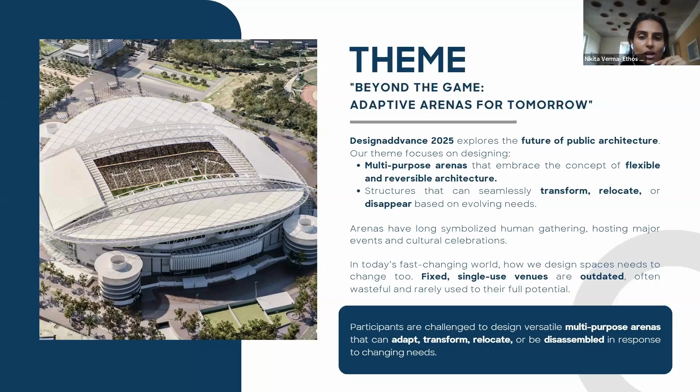municipalities. So, with that in mind, it is important that they are multi-purpose, they are flexible, they can transform, they can relocate, they're adaptable, and they're not just single-use and outdated venues, but are actually using resources more efficiently and are being used to their full potential. So that's the background of why this particular theme.

Now, going back through the history of civilization, even thousands of years ago, an arena existed. We all know about these very historic amphitheaters in Roman and Greek architecture. And then in between, when all the sports took off, we have fancy FIFA stadiums and cricket stadiums, Olympic stadiums.

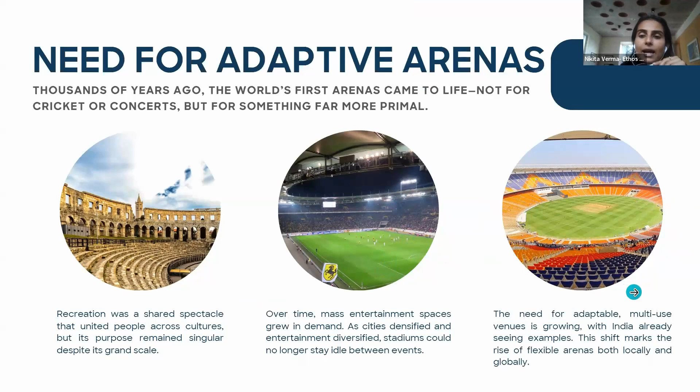But now with this conscious decision towards being more sustainable, more resource efficient, we are now in this era of adaptable multi-use venues, and we are already seeing some examples within India and of course in other countries across the world. And this is the era of making this shift towards flexibility. So let's look at some quick case studies so that you get inspired and understand what is really expected from you out of the competition.

The first case study that we are doing is the Stadium 974 in Doha, Qatar. We all know that Qatar hosted the FIFA World Cup just a couple of years back, and this particular stadium is made using shipping containers as well as modular steel elements, right?

So that means these are modular, these can be disassembled, reassembled, and so on. So flexibility is the key here. The stadium can be disassembled and rebuilt in any other place in a new location, either in the same configuration or in different configurations as well, because it's a modular system.

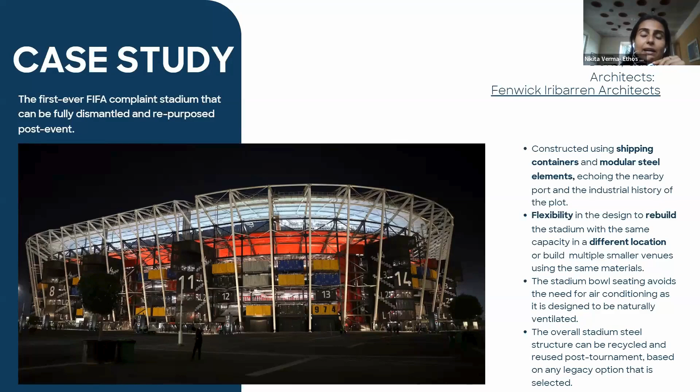This stadium is also very interesting from the perspective that it avoids the need for air conditioning. It reduces the load because the system is designed in a way that all the seating area is naturally ventilated. The overall structure uses steel that can be recycled and reused after the tournament is over.

Let's look at the second example today, which is Air Albania Stadium in Tirana, Albania. And this particular stadium, again, is designed to be a multifunctional venue that is designed to ensure safe, seamless separation of activities, allowing multiple activities and events at the same time.

The historic facade also adds value and kind of echoes the form of a Greco-Roman theater, which is relevant to that particular region. The building is, of course, a landmark for both sports visitors as well as cultural experiences for any visitor in the city. Steel design was synced with CNC machinery, ensuring high quality, fast production, so that the building can be assembled in much shorter time.

Let's look at a case study back home, which is the Ekana Stadium in Lucknow. It's an indoor multi-sport stadium in the capital city of Uttar Pradesh. And this stadium is used beyond cricket, as some of you might already know. It is, of course, a stadium of excellence, one of the best ones that we have in the country, with world-class infrastructure.

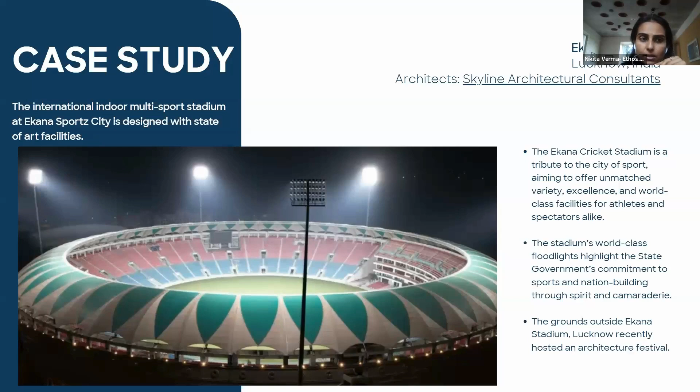But at the same time, the grounds outside the stadium are often used for hosting expos, exhibitions. More recently, the Lucknow Architecture Festival that we all might connect with. And it's often also used for practices and so many other activities beyond just the national and state level cricket matches. So that's another case study to look at in our own hometown.

So what exactly is the task? I see some hands being raised. Maybe we can take the questions once I finish running through the slides.

Thank you. So the task is, I think we are being repetitive here, but for those of you who might have joined later, a multifunctional, sustainable, accessible, future-proof arena. You're invited to design spaces that can transform, relocate, or disassemble as needed, provide as much flexibility as possible to these arenas to host not just that one particular sport it's being built for, but multiple other kinds of events.

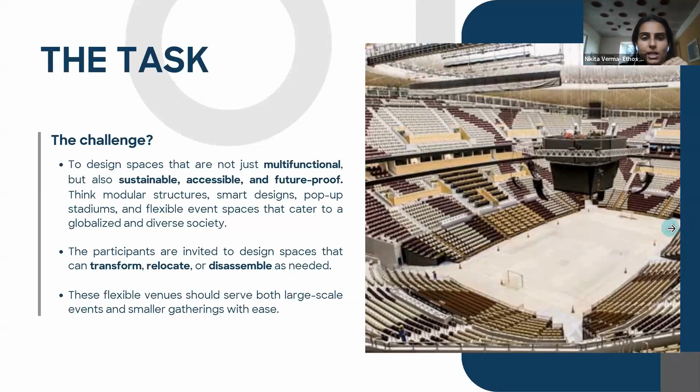For example, the DY Patil Stadium in Mumbai not only hosts cricket matches, but we all know that Coldplay was also a concert that was hosted quite recently over there. So that was an adaptation from being a sports venue to a cultural venue, and how more such cases can be taken up. So there are some guidelines and site program, which is of course detailed out in the brief document as well. But for your understanding, let's look at some of the salient points.

The site that you pick has to be in an urban setting. It can be any city of your choice across the world. It should be at least 10 to 15 acres, because we are talking about a large scale gathering of hosting at least 40,000 spectators in a major event. Of course, take into consideration the local factors like the climate and cultural context.

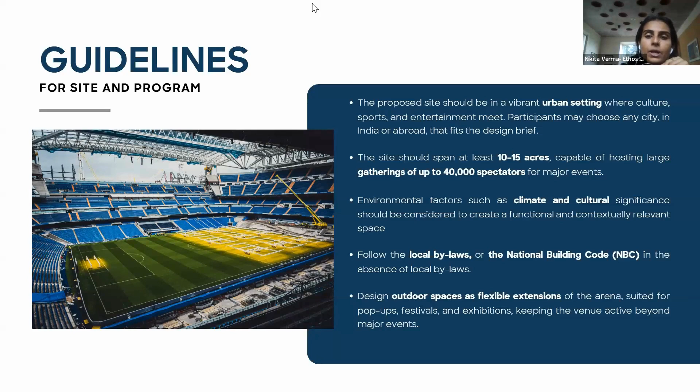Follow any local bylaws or national building code in the absence of local bylaws, and think of the outdoor and the extension spaces around the stadium that can be used for other events as well, apart from what's happening inside the stadium. Design considerations cannot emphasize more on adaptability and multifunctionality.

Scalable, how does your design allow for better crowd management? Is it ephemeral? Is it a reversible and circular design? Can this move or be configured in other ways than what it exists in? Do think about universal accessibility and experience. Cultural sensitivity and architectural identity, so it's responding to the context it is built in. Sustainability, and of course, it needs to be smart infrastructure with digital integration, because we are in the era of that right now.

Awards and cash prizes. There are handsome cash prizes for the first, second, and third prize winners. Apart from that, every eligible entry gets a participation certificate. The best 10 entries will be published on the competition website. And also, all the participants who've submitted their entry also get a discount voucher of 40% for a BIM design program. And there'll be recognition for institutes that manage to adopt the competition brief into their classrooms.

So, if you haven't registered yet, please go to the website designaddvance.in and register your team. The submissions close on October 29, so we have quite a lot of time from now onwards. And if you have any doubts about eligibility, let me also just take you through that.

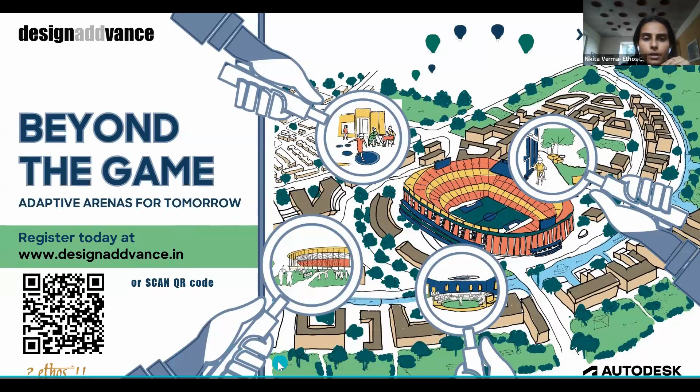Any other hands raised? I think I'll stop sharing my screen if there are no more questions. Then back to you, Team Arkance, for taking it further. Okay, thank you, Nikita, for decoding the brief. And also for the participants, if you still have questions, feel free to drop it in the chat box, and then we'll be answering all your questions in the end. Okay, so allow me to share my presentation.

Okay, now I'll be quickly giving an introduction of my company, Arkance India. So Arkance India is a leading technology and engineering solutions provider, especially focusing on digital transformation for the construction, manufacturing, and infrastructure industries. The company leverages advanced software and strategic consulting to empower AEC businesses through smarter design. Also, we have a global presence, and we have more than 550 plus technical resources spread across the globe.

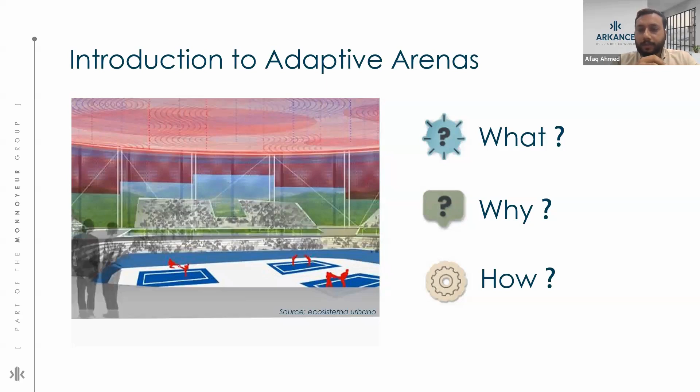as a competition, you will have to prepare a design that will stand out among others. So for that you need to understand why we need to have adaptive arenas. So I believe that there are three questions. If you can answer these three questions correctly, then you will be able to produce the accurate or the right result.

So let's try to understand what exactly are adaptive arenas. Arenas, as you know, are a place where people come together to watch sports, enjoy concerts, and maybe celebrate culture, or maybe for public interactions. And when we add adaptive, it means the concept of flexibility. Whether these arenas are flexible enough to carry out activities apart from sports, like whether they can be used in the time of calamities, or in the time of urgency, in the time of need where people need shelter.

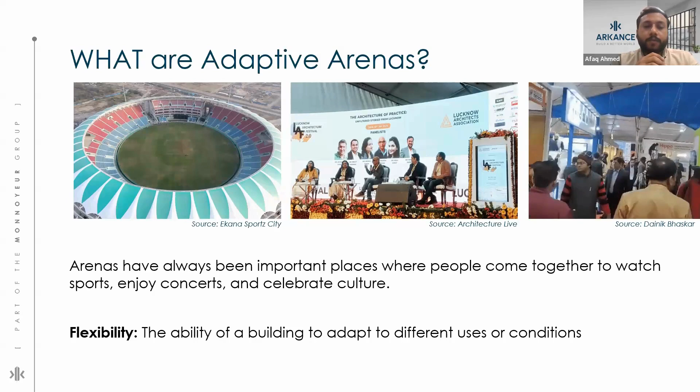So once you understand that adaptive arenas are of course those which can host multiple types of activities, not limited to only sports activities. So okay, we know what arenas are, but why do we need that? Why is there lots of emphasis on creating adaptive arenas? This is the reason why the theme for this year, Design Advance 2025, is adaptive arenas. Now, the number one reason is the rapid population growth.

You know that now India has become the most populous country in the world, and New Delhi is the second most populous city in the world after Tokyo. So, with this rising population, people really do not have the space for recreational activities. We all know how physical activities are important for the betterment of human beings. But seeing the congestion in the cities, unavailability of land spaces, people are forced to live in ghettos, right? So this rapid urbanization and population growth has become a major challenge for bigger cities, which often leads to degraded quality of life.

Another important factor why we need to have adaptive arenas is underutilization of spaces. Most arenas are used only for specific events and times, and so they remain empty and unused most of the time. So imagine how much money and how much material have been invested in creating those gigantic structures, and just imagine that they are used once or twice in a year, and they remain unused throughout the year. They often degrade with time. So it seems like it is somehow a wastage of money and resources.

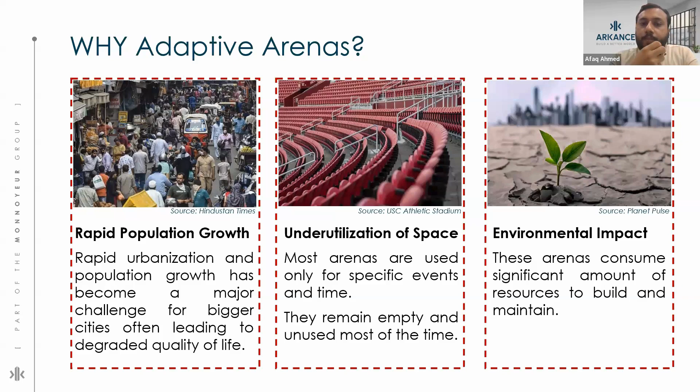And another reason why we need adaptive arenas is to encourage community engagement, because these spaces can serve multiple community needs. For example, people have a habit of going on morning walks. But imagine that if you do not have such parks and spaces in your locality or in your society, of course you will not be able to go for a morning walk. In fact, one example I can recall is Jawaharlal Nehru Stadium, which is open to the public in the morning, and you will find a lot of people going there for morning walks. So, like that, we can also use these stadiums, these arenas, for different other activities as well. This will also help us in strengthening public values.

And another important factor is the rapidly changing needs. We all know the number of hazards that are happening here, and the calamities that have been caused. Recently you must have heard about the incidents that have occurred, which have displaced many people. You can see cities are getting flooded, and sometimes there are earthquakes, sometimes there's a fire breakout. So in those situations we need to relocate people very quickly in order to provide them shelter.

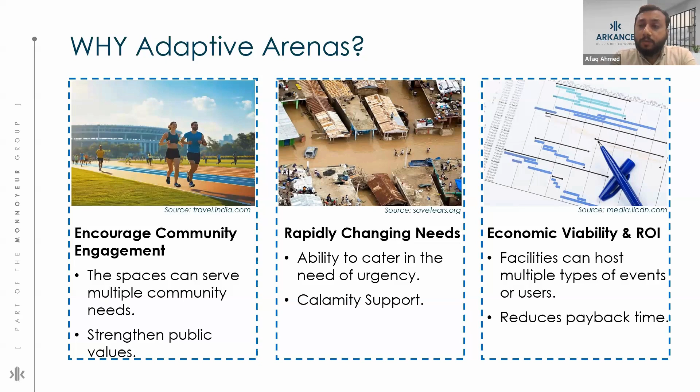So now you must have got a little bit of an idea of why it is important to have adaptive arenas. Why not have them just for sports events and let them be vacant for the entire year? Now, the third most important question is how we can achieve adaptive arenas. And of course, this will help you a lot in competitions, because this is where you will be thinking a lot about how you can create adaptive arenas, right?

So in order to answer these questions, I have tried to break this down into three parts. The first part is about planning and designing. This is, of course, the first stage of any construction or any project, right? So we will have to do the right type of planning and the right type of design for creating those adaptive arenas, because this is the first step. If your first step is wrong, then your second and third steps will have an impact of it.

Once you have done the planning and the designing correctly, the next part that comes, which is a very important part of the competition, is what kind of material do you choose. Choosing a material is again very important, I will say, because your entire structure will be dependent on that, and the lifespan and the adaptability features will all depend on the materials, because material is going to help you in changing the activities of the stadium or arenas.

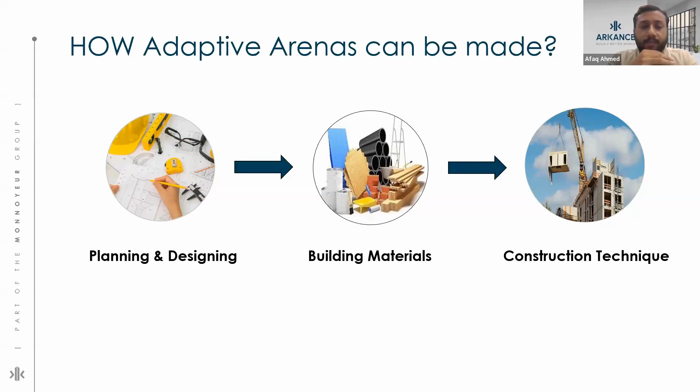Now once you have the right set of materials with you, next comes how you can assemble those materials, how you can use those materials, and what techniques you can use for building up these adaptive arenas. Now in the next slide I have covered these three steps in detail, so that you can get an idea of what points you can consider while planning and designing. So just a second.

Now, the examples that I am telling you have all already been experimented with on actual projects. If you take the example of Madison Square Garden in the US, that stadium can easily be converted from basketball to ice skating to hosting different events, right?

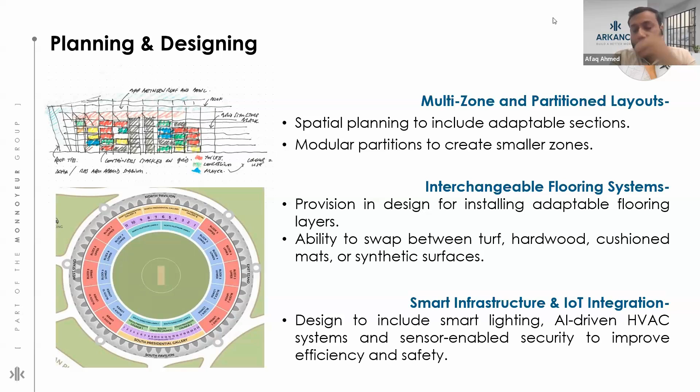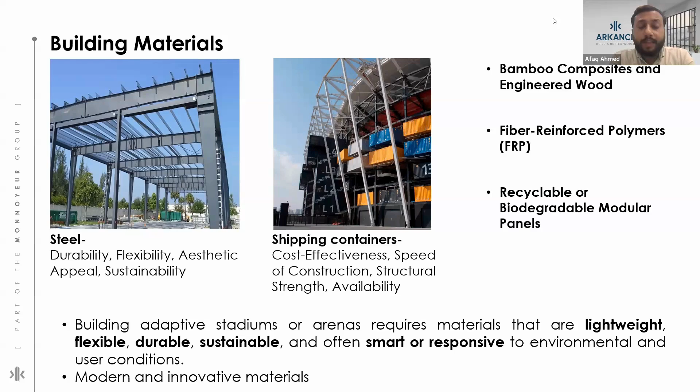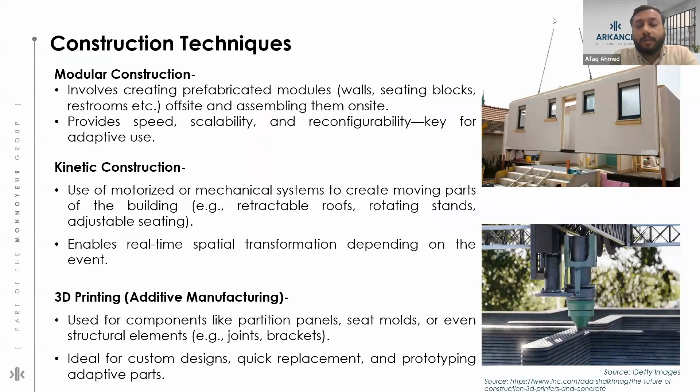Next comes the construction techniques. So what technique will you be using? Will you be using the traditional system that we already use for creating structures? Or is there some kind of innovation in that also? You are well aware of modular constructions, prefab constructions, where you develop the components of the building in a factory, then bring them on site, join them with different details, and then you have an entire structure ready. So that can be one concept, of course.

Like in the case of Stadium 974, which I'll be talking about later in detail, focusing primarily on its adaptive features. But in Stadium 974, you can see that shipping containers have been used, and the technique they have used is modular construction. Another concept can be kinetic construction.

Now, what do you mean by kinetic construction? It is something where you can practically move the building components. Like if you have a smaller area with a partition wall, this partition wall can be moved to create large spaces with the help of some motors or mechanical systems, maybe retractable roofs, rotating stands, or adjustable seating as well. This enables real-time spatial transformation depending on the event. Depending on the need, maybe you can use it on the outer facade where you can easily control the width of the entrance, right?

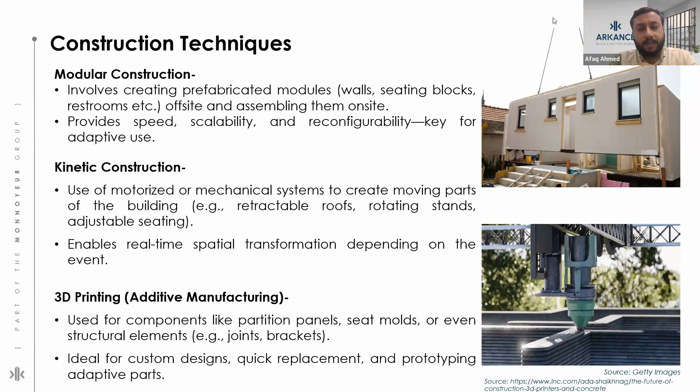And then the third technique which you can use is, of course, 3D printing. We are not printing the entire arena, though we can make components using 3D printers. You can make partition panels, you can create seat molds, or even some structural elements like joints and brackets can be created from 3D printers.

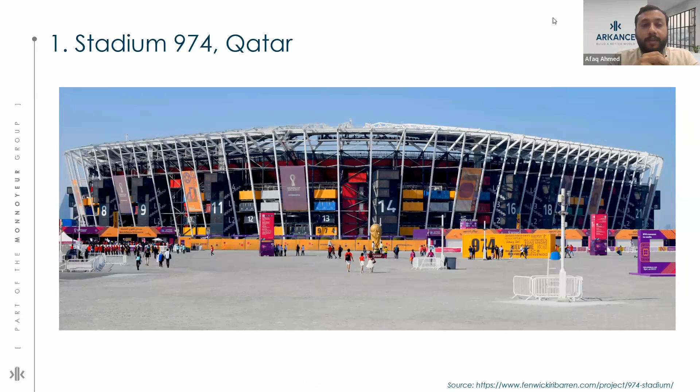Okay, so now, since these case studies have already been covered, I will try to cover them from another aspect. So if we talk about Stadium 974 Qatar, this is my question to everyone. You can drop your answers in the chat box: what does 974 stand for here? This is a very unique digit, Stadium 974, and it has a very good logic behind it. So if you know what 974 stands for, feel free to answer in the chat box.

And then the general information of this stadium: it is located in Doha, Qatar. It has been designed by a famous Spanish architect, Fenwick Iribarren Architects, and the major event that has been hosted here, if you are football fans, was the 2022 FIFA World Cup. And this is the first completely movable stadium in the world. The entire stadium can be dismantled and transported to other sites.

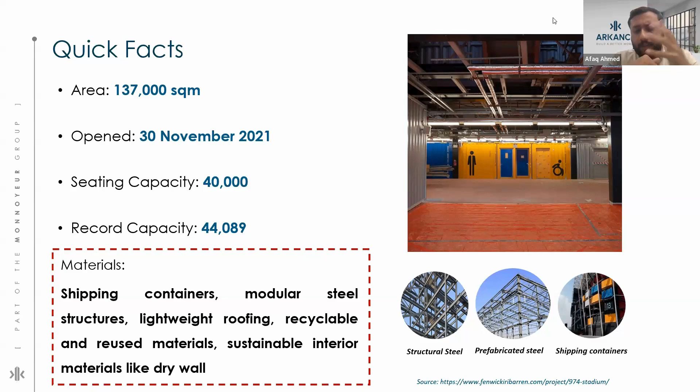Now, quick facts about Stadium 974, and of course, pay attention to all these details in the case studies because this will help you in fetching out some unique and innovative ideas for your entries as well. The area of this stadium is 137,000 square meters, and it has a seating capacity of 40,000. The major material that has been used here is shipping containers. With that, the main structure is composed of modular steel, and it has lightweight roofing and recyclable and reusable materials. And along with the shipping containers, drywall has also been used.

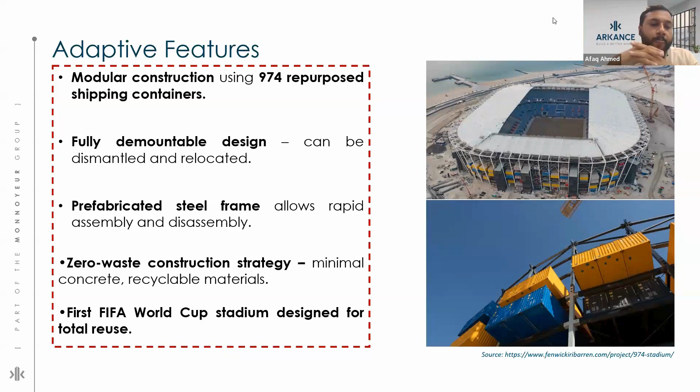Now, if you talk about the adaptive features, the first feature is that it is fully demountable. It can be dismantled, transported, and easily assembled again on another site. Then it has a prefabricated steel frame, which allows rapid assembly and disassembly. Then zero waste construction, because you are not demolishing anything, right? Whatever you are dismantling, you are using again. There is a concept like the traveling circus, where you create the entire space as per your need, and once your work is done, you can just take it back with you, right? So this was the first FIFA World Cup stadium designed for total reuse.

And about the conceptualization, again, you can take some hints from here as well. These shipping containers are placed on grids. We all know as architects and engineers how important grids are for us. So these containers are placed on the grids, and they are also color coded. As you can see in the concept, the red colors are used for toilets, whereas the blue color is used for prayer. So likewise, it has been color coded.

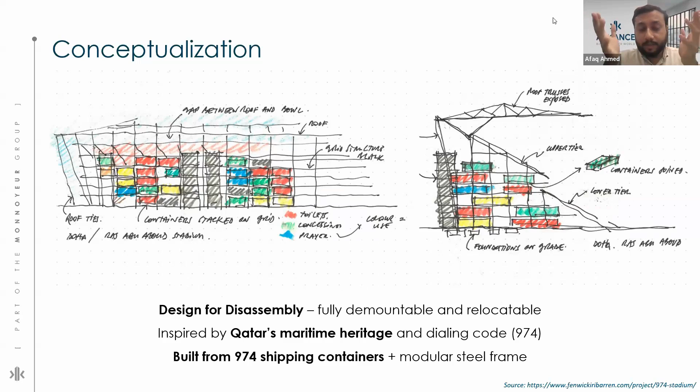And the second example I have for the case study is Air Albania Stadium. It's located in Tirana, Albania, and it has been designed by a very famous Italian architect, Marco Casamonte, who is also a full professor at the Faculty of Architecture, University of Genoa. The major event that has been hosted in this stadium is the 2022 UEFA Europa Conference League.

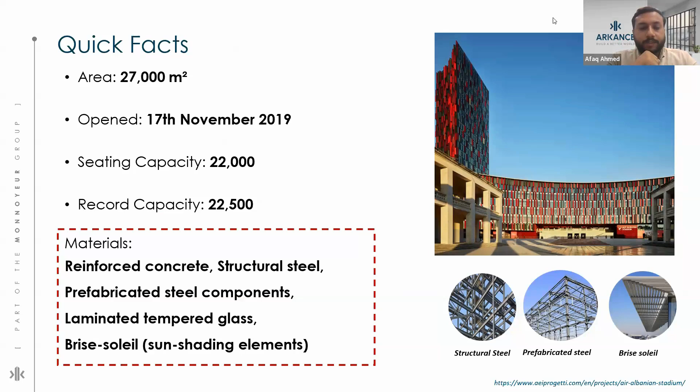Now, the quick facts about this stadium: the area is around 27,000 square meters and the seating capacity is 22,000. If you talk about the materials, reinforced concrete has been used, structural steel is there, and you have prefabricated steel components as well. They have also used brise-soleil here as a shading device. Now, the adaptive features here are generally in the form of planning. More emphasis has been given to the planning stage rather than to the material. It has a multifunctional octagonal design.

Also, the integration of BIM and the CNC fabrication. So the benefit that we get using BIM is that we have the entire information of the stadium in the digital format. So whenever we need to take a decision on whether we can use it for multiple activities, then of course you have information about different walls, like which type of wall can be moved, especially which type of flooring can be interchanged. So all this information is already stored in the BIM model.

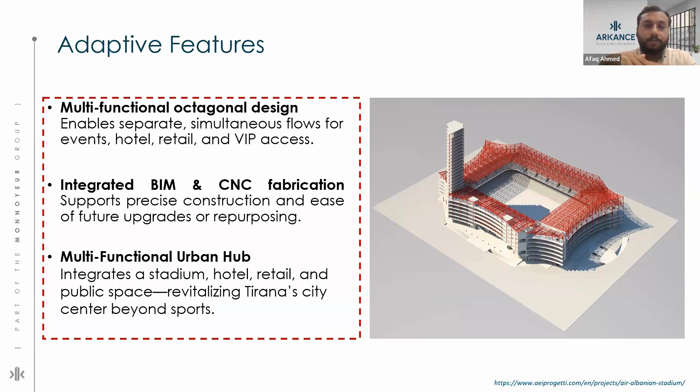Also, it is a multifunctional urban hub. It's not only for sports events, because it integrates the stadium into hotel, retail, and public space. Again, you can get an idea from here, like if you are proposing an adaptive arena for a specific place, and the place is short of hotels or retail or public space, then you can just integrate these spaces also. It's not necessary that only once the sport events are done you will reuse it. You can integrate different activities, just like in the case of Air Albania Stadium.

Next, we come to the Ekana Cricket Stadium located in Lucknow in India. This has been designed by Skyline Architects. The major events that have been done here are, of course, one day international matches. Apart from the sport events, the oath ceremony for the UP CM has also been done here. And as I talked about initially, the Lucknow Architecture Festival has also been hosted here. So you can get an idea that it's not only meant for sport events. They can also be used for multiple activities.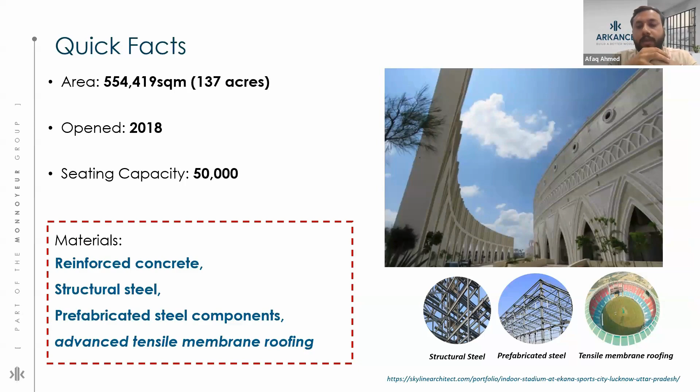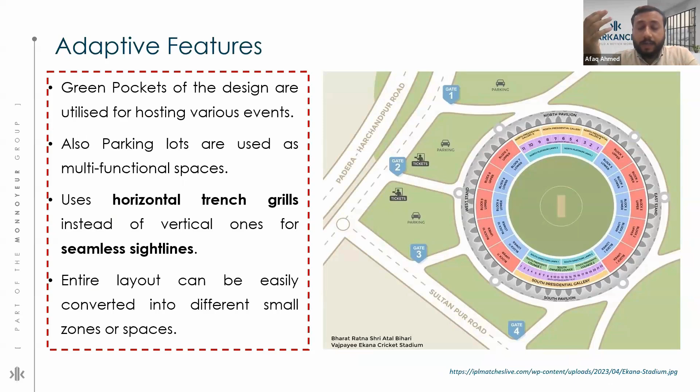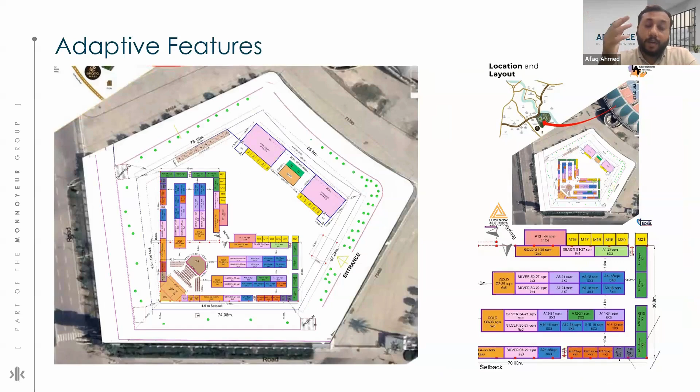Now, if I talk about the adaptive features of this, as you can see on the screen, this is the layout of the stadium. I have personally attended the Lucknow Architecture Festival. So in the next slide, I have some layouts that were used during LAF. You can see how the empty pockets or the green pockets of the stadium are used for hosting a 3-day event of architecture for the architecture fraternity. Right.

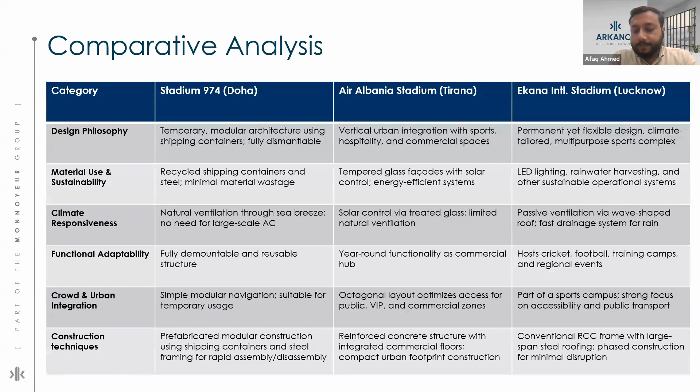So now since we are already running short of time, let me just quickly move to Revit and let's see how Revit can help us in creating successful adaptive arenas. So I'll stop sharing my screen now and I will reshare my screen. Let me just quickly open my Revit.

So again, this is my open question to all: in what ways can Revit help you? Okay. So what is the difference, like why are we using Revit, why not AutoCAD? Even if we are using Revit, we cannot just create simple walls, simple roofs, simple columns; that will not work out. We do not want to create something traditional. So we need to think out of the box in creating those adaptive arenas. So let me just open a new project.

So there are three features of Revit which you can use for preparing your proposals. One is the massing feature that we have in Revit. Second is adaptive families, and the third one is design options. Now, why I'm saying design options is because you will have to show your space in multiple formats. One space you will have to show for multiple activities.

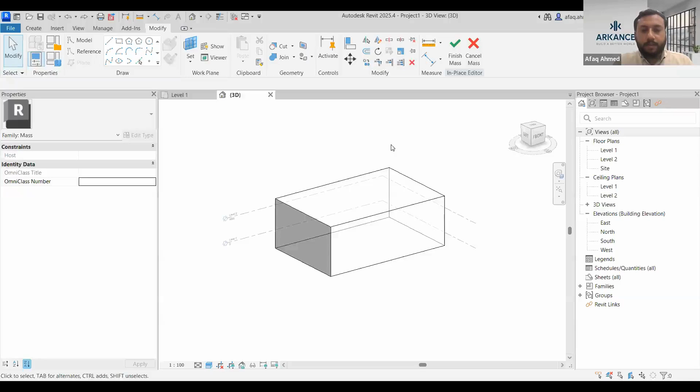Okay, so let me just quickly recall what I have done. Let me delete this and show you the process from the start. Let me come out from the massing mode. So the first tool that you can take help from in Revit is massing. In order to use massing, you need to go to the Massing & Site tab here. Then you need to go to In-Place Mass, let the name be Mass 1, and then I activate my mass mode.

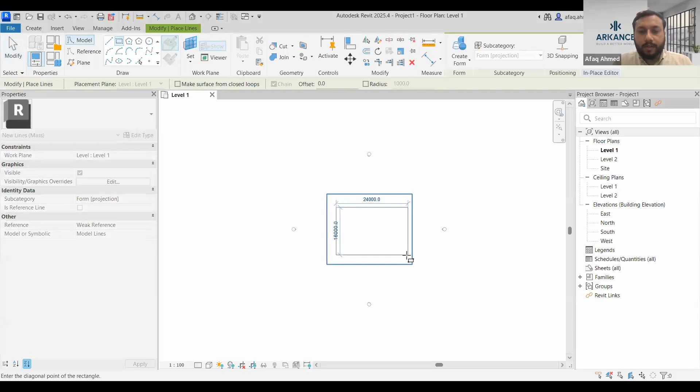Then I need to create any shape or profile. If I need to create a cylinder, then I need to create a circle, or if I'm to create a cuboid, then I can simply use the rectangle tool, create a rectangle, and it's better to work in 3D while working with massing. So I'll go to the 3D view, select this profile, and then I will go for creating a form. You can also change the height from here. Maybe I just have it for 5 meters. That's it.

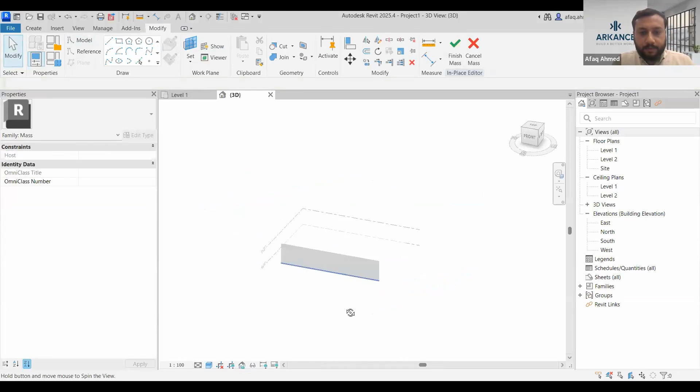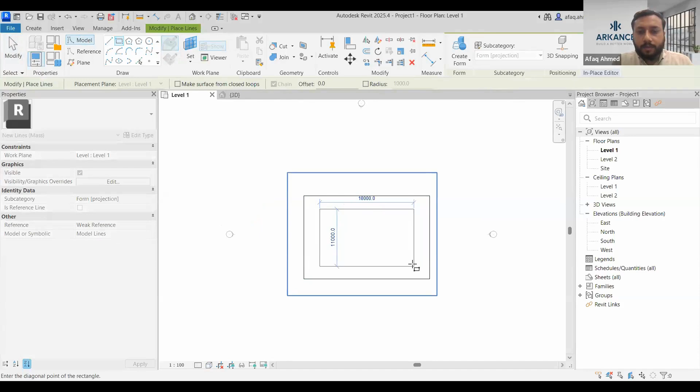Let's say you want to create a cavity inside it. So again, you can go to Level 1. Again, I will create a rectangle inside, or maybe I can use the option for lines, or maybe I can go with the rectangle tool. So I'm just approximately drawing the rectangle with offsets.

And if I select this rectangle inside, now I have two options, either to create a solid form or I can create a void form as well. So selecting the shape or the profile, I can go this time with void form. As a result, this will create a cutout from inside. Now you can also try with an elliptical shape. You can also try with circular. The steps remain the same.

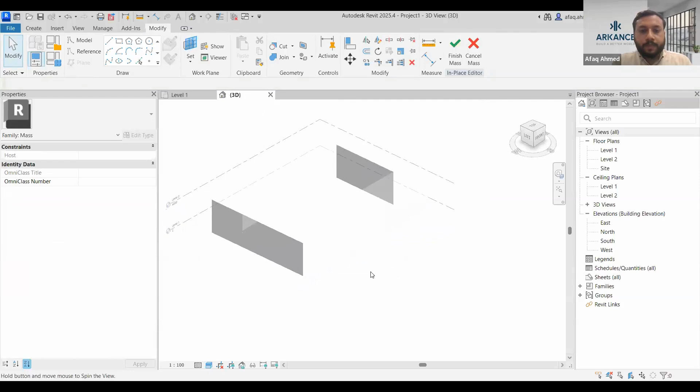And also the advantage that you get is, if I need to change this, I can just change it from here. Simply, I will be picking up this line and then changing it a little bit like this.

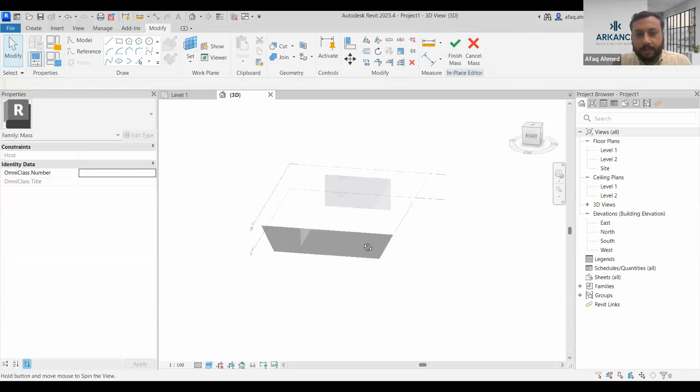So this will ultimately be taking the shape of your stadium, right? Maybe. And another advantage that you get working with massing is that you can convert these elements into walls, floors, right, into different structural elements. Let's say if I've created this facade at the side, which is of course inclined, so it will be quite difficult to make curtain and the panels here.

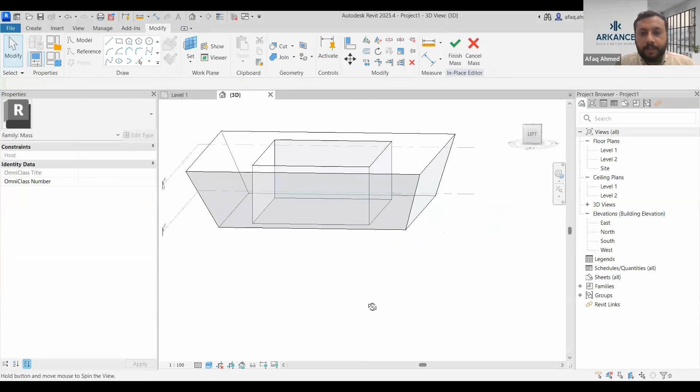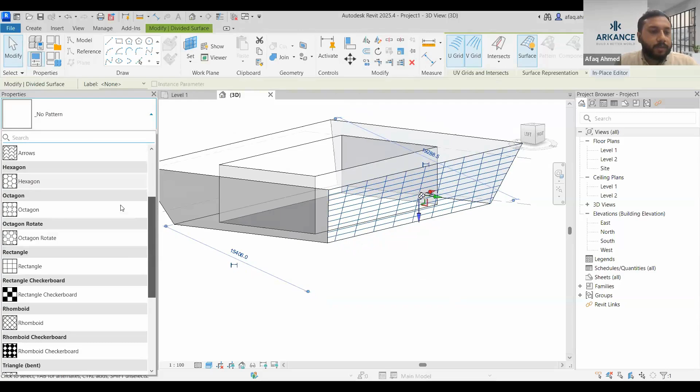But we have an option that I can convert this face. I can select this face, and I can convert into horizontal and vertical grids. So not only horizontal and vertical grids, in fact I can change the pattern into, let's say, triangular or into hexagon. So these patterns can be accessed from the properties dialog box. So if you go down, then you can see that I have multiple options, like I have hexagon. So this will take a hexagon shape.

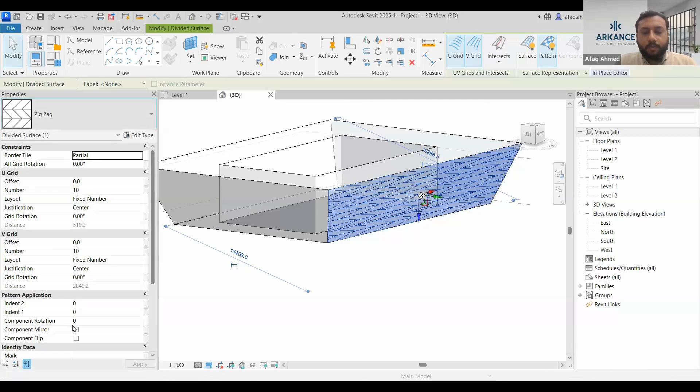Of course, later on you can change the properties of it by changing the rotation and by changing the number of grids that you have here. Apart from it, you can also go with, let's say, a triangle, and you can also go with zigzag pattern. So with this only, you can also further manipulate and create different types of patterns. So for now, let me just quickly go to a hexagon pattern here. And we have something like this.

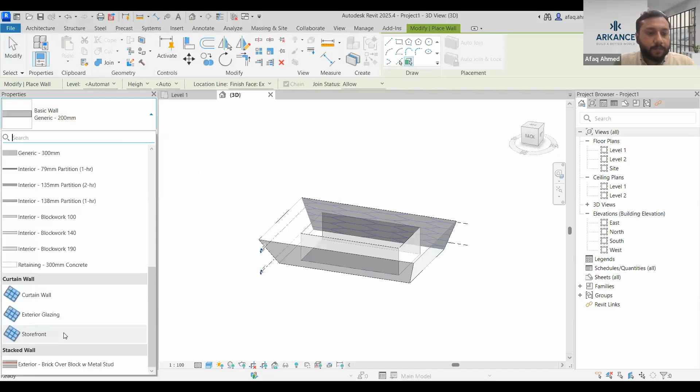Now, another advantage is that I can also convert this face. Now this applies to all the faces. If I select this face, or maybe just let me come out from the mass mode. So I will finish my mass and I will come out from the editing mode. And now if I go to the wall, then I can choose the option wall by face. Now, let's say I need to create a storefront wall. So if I select a face, it will be automatically converting it into a storefront wall.

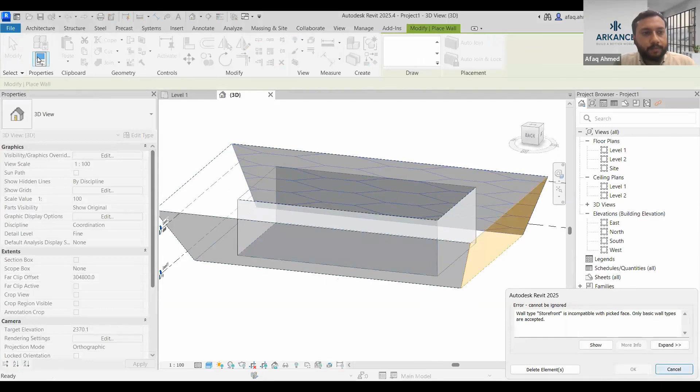With the pick face only basic wall types are accepted. Okay, it's fine. Maybe later on we can convert it. So if I select this again, if I go to the wall by face, select this time. Okay, so there's some error. We'll go wall architecture this time. We will use maybe a basic wall this time. And we will select this face. And then you can see that easily it has converted the face into a wall.

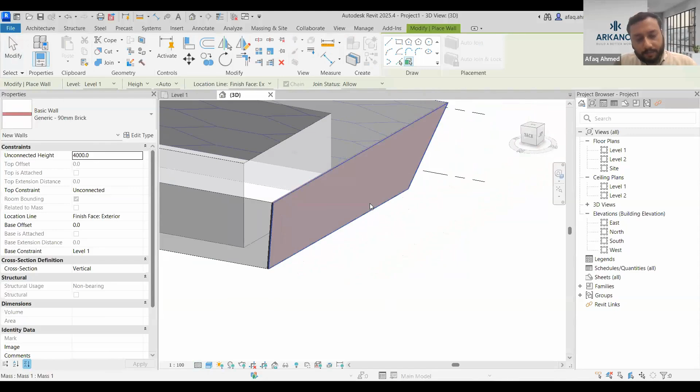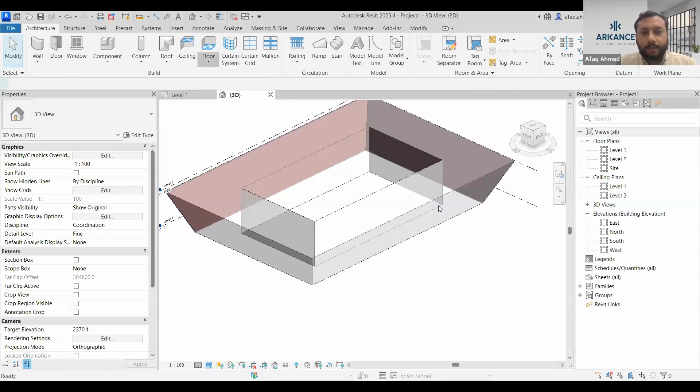Likewise, you can also change and convert your floors, like the top floor that you can see. Stop. So if I go to, let's say, floors, and then you can see, sorry, floor by face. So I go to floor by face, and now it will be ideally picking up the face. Okay, we have to see why it's not picking up.

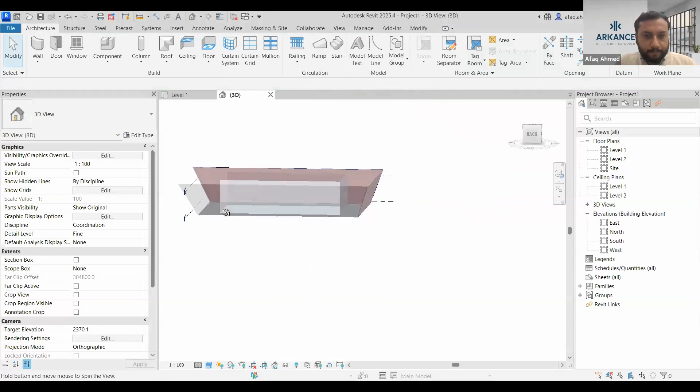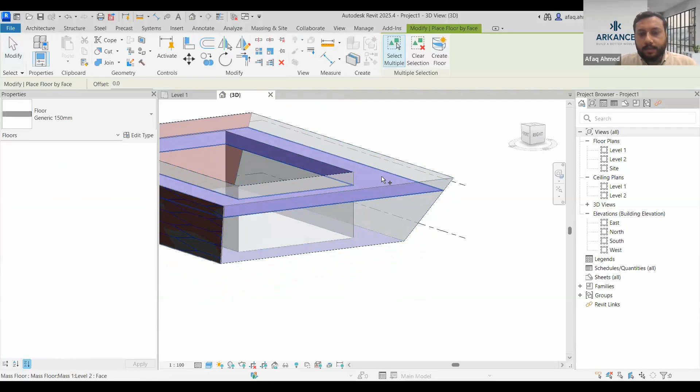Okay, so once we have placed the floor, then later on we can convert it. So again I go to the floor and then I go floor by face. Now you can see that I can easily select this surface, and this will convert my surface into a 150 mm thick floor. So if I select this one and select this one maybe down, and then okay, so it has created and converted into a 150 mm thick floor, right?

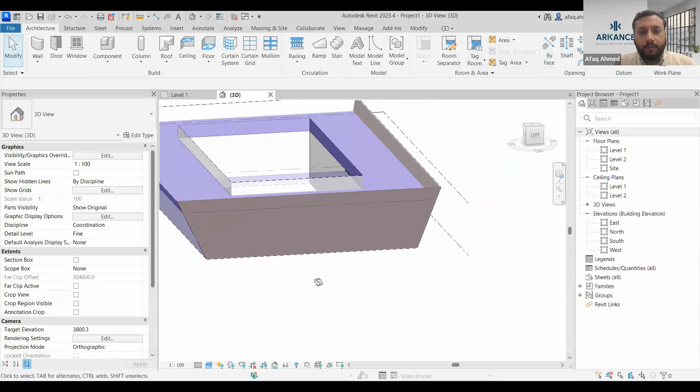So this way you can leverage these tools of Revit in creating multiple shape forms. Of course, we'll be having more webinars on the workflow. So maybe we can cover in detail in the next webinar how you can take it from here. Further, you can develop it in the later stages. Like from the conceptual, you can go to the schematic, and from the schematic, you can go to the detailed design.